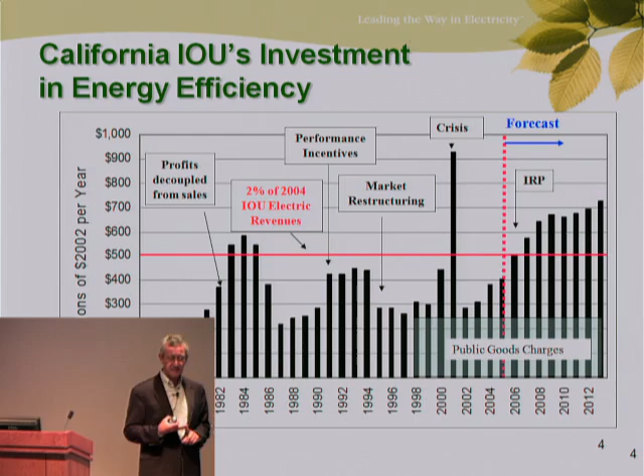So we've had a very long history of providing incentives, of marketing our programs, and you can see during the energy crisis, there was a lot of investment. And now, finally, instead of reacting to short-term needs, one crisis after the other, the state has developed a long-term plan to build in efficiency and to build in the right signals for customers so that we can have a better future.

Now, over those years, we have avoided building lots and lots of power plants. And the hardest thing for people to understand is what you don't have. We all understand what we have, and we all understand what was taken away from us. But we don't really understand what could have been.

And you can see here, we have avoided building or buying all of this energy as a result of the leadership of the state of California, in that California would not allow the imports of inefficient appliances, like refrigerators and water heaters, number one. The second thing is that California won't allow inefficient buildings. We have building codes, Title 24. This building that was built in accordance with state standards is more efficient than most other buildings across the country.

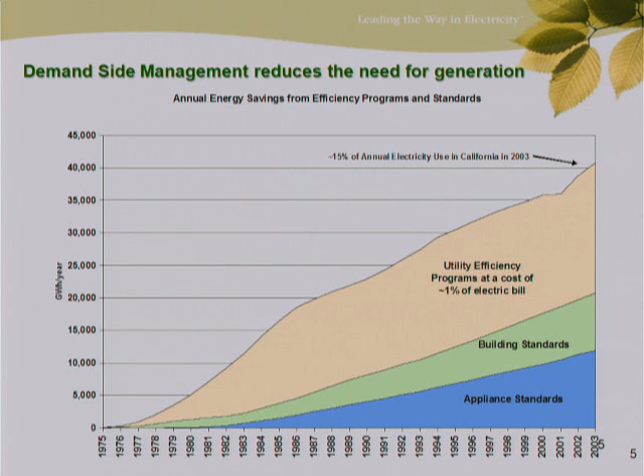And the third thing is that once you decouple the profits from sales, then utilities have an incentive to go out and make sort of unsell their product. And that has really made a difference here.

And so compared to the rest of the United States, per capita, meaning for every person that is in that state, the usage across the country has gone up. Whereas in California, it's remained pretty much the same. Even though there's 35 million people in the state, the amount of energy they use is pretty much the same as it was back in 1974.

It's amazing, even though we have lots more stuff, okay - microwaves, bread makers, big screen TVs, you name it. The energy intensity has gone up, but it's more efficient now, just like the number of cars.

So what we are doing now is replacing power generation with customer assets. We've had, for example, I believe it's Indiana, 95% of their energy comes from coal. Coal's very cheap. In China, they're building a coal plant every month. It's a very inexpensive fuel, but it's a very dirty fuel. A lot of GHG comes from coal. Nuclear plants don't generate atmospheric pollution, but you can't build them anymore because of a lot of restrictions.

Combined cycle plants are those you see out by Morro Bay and by the beach with the big plumes of steam - those burn natural gas. The more people you have, the more you need of those type of systems. And then you have your combustion turbine. This is a little small unit that you usually see over in industrial parks, and they're about 50 megawatts in size. You put those strategically. They're very expensive, but they are what you need in a pinch.

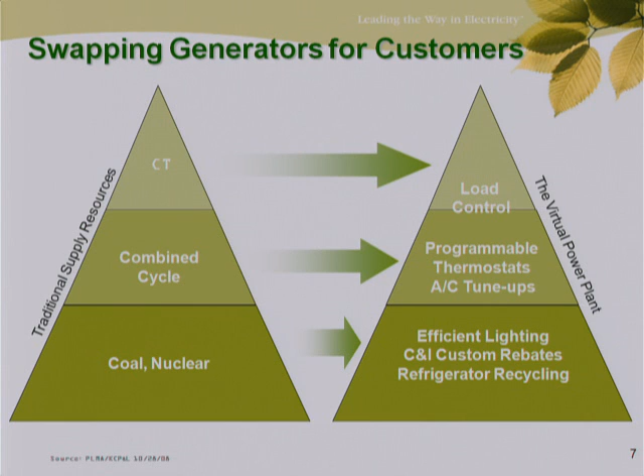So what we did, we activated load control. We turned off air conditioners. We asked businesses to shed load. And it was July 21st, sorry.

And that's when the red line, which is the usage, gets close to the green line, which is how much power you have. Because the state only has so much power - it's like only so much water.

We can't control the population. They are going to use their air conditioners when they need it because they built that house and they want to use it. So we can ask for voluntary conservation, but sometimes it just doesn't reach it.

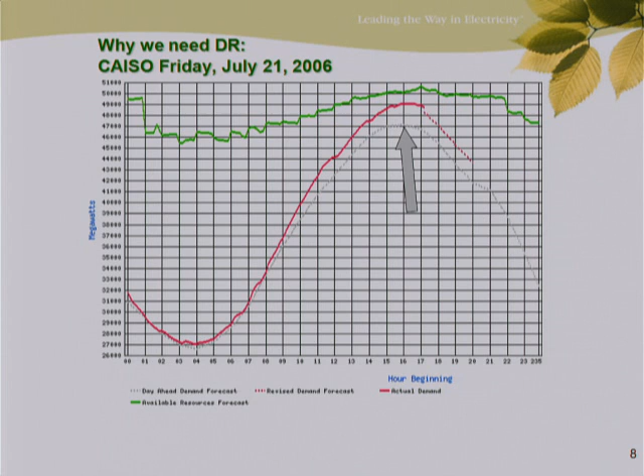So right there was what our forecast was, day ahead, at 47,000 megawatts. In actuality, we peaked up at 49,000 megawatts, but that's only because we shed.

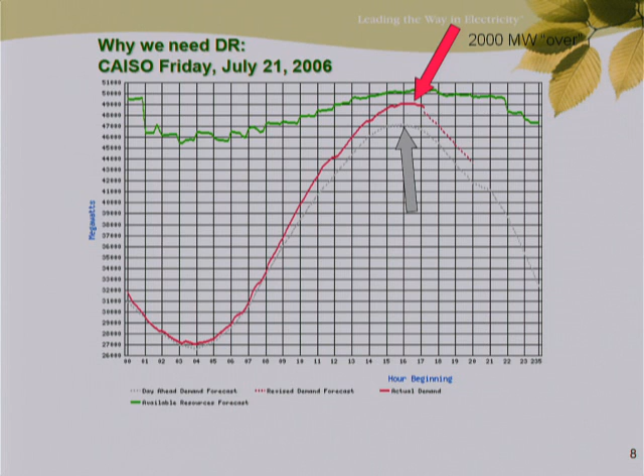Okay, and this is the impact. The red line would have been, again, that concept, where you would have been as opposed to what you are. So the actual load at Edison of all 4.5 million customers was that nice green line, but it's only because that we were able to reduce about 400 megawatts through these control programs.

That's what we like to call, and there's a fellow over at Lawrence Berkeley named Alan Meier, he calls it saving energy in a hurry. We all want to conserve energy, we all want to be efficient, but every once in a while there's a drought in Brazil, or a nuclear plant shut down in Tokyo, or in Juneau, Alaska there's a landslide that cuts off the power lines, and you've got to shut down energy in a hurry. So we always have that in our back pocket.

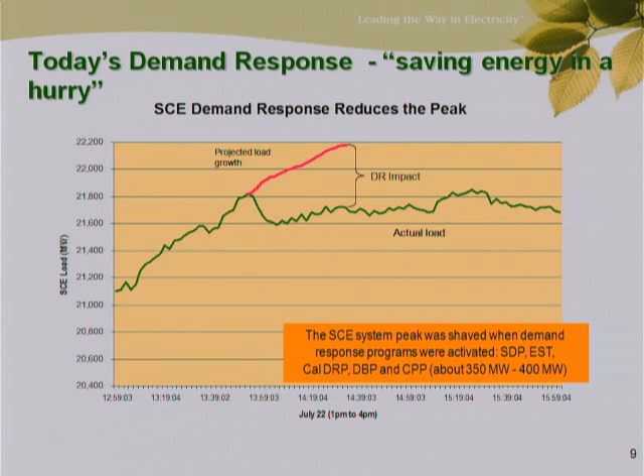So the state of California says, this is fine and dandy, we've been fussing about all these different things, but the state's still growing. The economy is good with temporary mishaps. How are we going to have the long-term vision? And the long-term vision is, we've got to stop building power plants. It's got to be efficiency, and it has to be saving energy in a hurry programs. And then, if we do build power, that's our number one priority.

The second priority is, if we're going to build a power plant, let's do it with renewables because they're cleaner. It may not be the cheapest, but it's the right thing to do, and it's less of a pollutant. Then you have, if you're going to do generation, let's do generation the right way with efficiency. And then the fourth priority is, you don't put a bunch of windmills in downtown Berkeley. They're usually out in the Tehachapi Mountains or at the Altamont Pass. You need a transmission line to get them over. And that's the other priority as well.

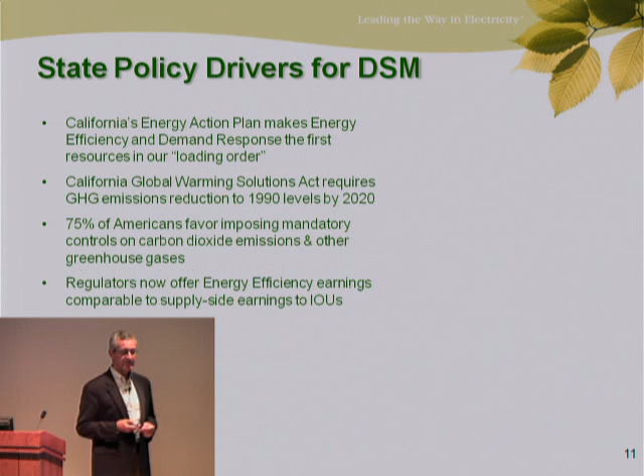So we have the Energy Action Plan, which is the first policy. There are the Global Warming Acts, GHG. There are rules and laws about reducing our carbon footprint. And there seems to be a consensus about that. And to make these programs even more effective, California regulators now, instead of just letting us earn profit on our assets, for all the kilowatt hours that we save, we can earn a profit on that too. It's called the earnings mechanism.

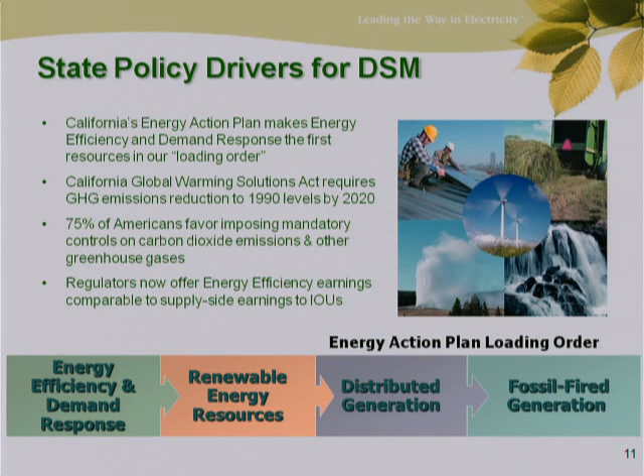So these types of things, it's the loading order: energy efficiency and demand response first, the renewables next, distributed generation, and then fossil fired last order. We've got to get all this stuff done first. Doesn't mean we'll never build another gas power plant on the coast, but we've got to get through all of these as a priority first.

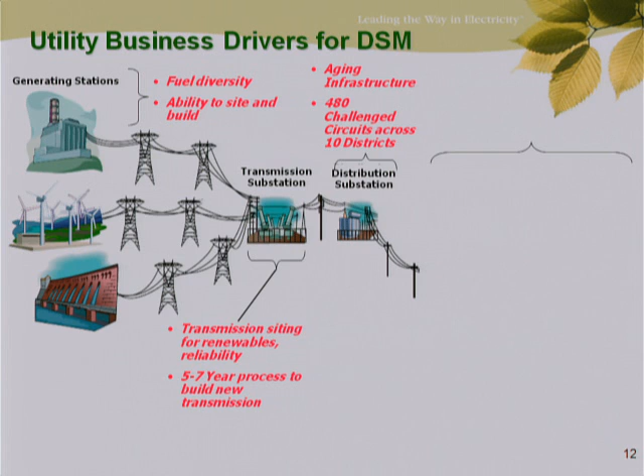Now, what's in it for the utility? Well, let's look at what we've got going here, which are our generating stations and our transmission lines. We have the ability to use different types of fuels. We have the largest renewable portfolio at Southern California Edison, so we're buying lots of renewable power. We can use water, wind, natural gas, lots of different things. And it's important that the assets we have for transmission lines, they do take a while, but we can site them effectively. However, our infrastructure is aging. After you've been a utility for over 100 years, a lot of wires and power poles and things get old, so there's a constant need to upgrade these things.

So with energy efficiency and demand response as programs, and this new thing that's coming out called Edison Smart Connect, it's all linked to customers. Now, before it was all about the utility infrastructure, the power plants and so forth. Customers weren't mentioned before, but now it's about the customers, and they become a part of the supply chain. And that's going to be important now.

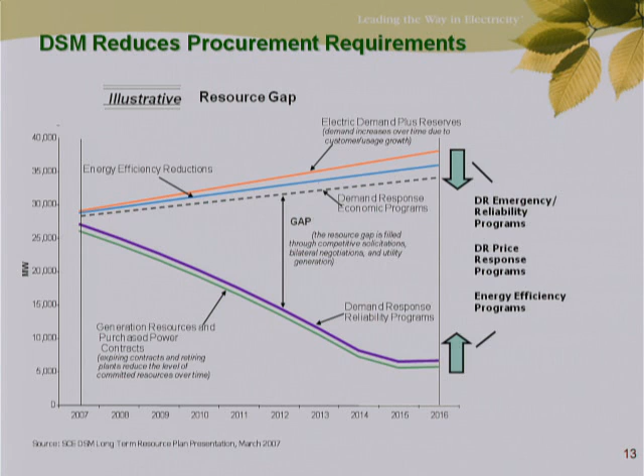This graph is a little busy, but what it shows you is that as the growth goes up, you're able to bring down that gap. You can reduce your resources. The one charter we have with utility is to maintain power reserves and be able to supply power without running out of electricity.

Customers don't understand that. They say, I'm paying my bill, why don't you have enough power? So now with the new loading order, which is state policy and may soon be federal policy, you really have to work on the customer side of things.

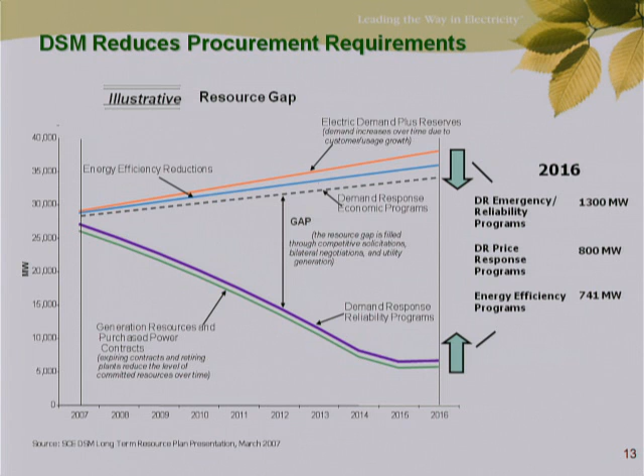So we're talking about 2016 being able to come up with hundreds, if not over 1,000 megawatts of what Amory Lovins coined the negawatt. It's not a megawatt, it's a negawatt, because it's a non-watt. You can't measure it because it doesn't exist. You can only estimate it.

So now we bring in the economists and statisticians. In the old days, it was all about power engineering, about construction and so forth. Now that you're dealing with sort of negative power, and with things that are intangible, you have to bring in the intangible experts: economists, social scientists, and so forth.

That adds up to about 2,800 megawatts of negawatts that we have to come up with.

So what's our philosophy and what's our big plan, our vision? Now the vision is what I call the nature of things, and that's what we build and what assets we have. You can see it's renewable generation and a smart grid, and then a smart connect, which connects to the home and to electric vehicles and all sorts of other things too.

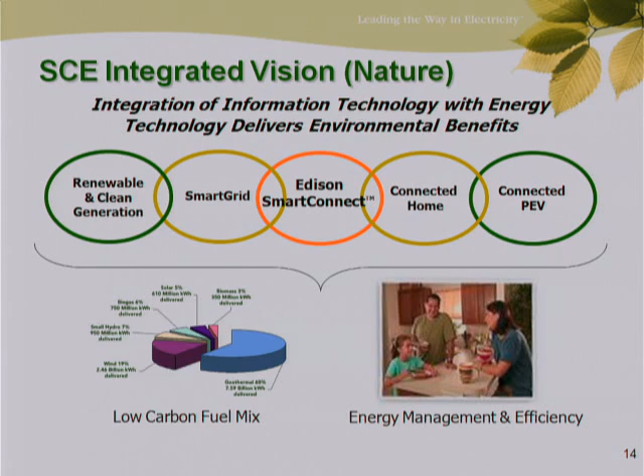Because now our customers are not just buying big screen TVs, they're putting up solar panels, they're getting electric plug-in hybrids, they're doing lots of things. We have to be smart. We used to ignore that, we'd say it is what it is. We kind of forecast and look at trends.

In the 1980s, there were a lot of water beds with electric heaters on them, about 200 watts, and we thought, is that going to be a trend? Well, they all went away, but they were replaced with microwaves, gaming systems, computers, laptops, and satellite boxes that have more than doubled the energy use in homes. People wonder why they're still getting a bill when everything's off. Well, it's those vampire loads, things that are still running. So this is all going to connect up, and the grid is going to know what's happening in the home.

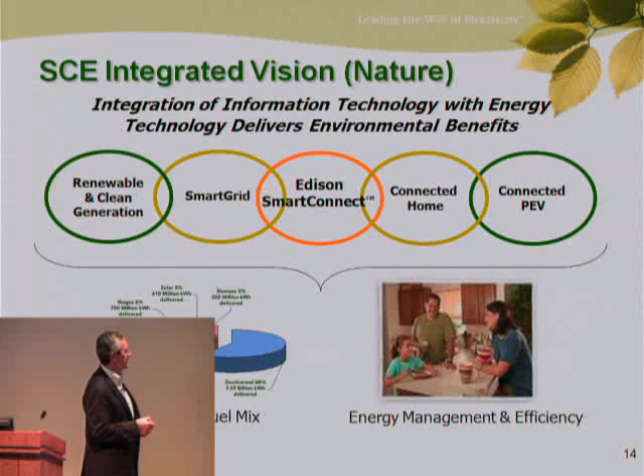Now, Smart Connect is sort of a fancy word for our metering system. Traditionally, for 100 years, meters were not very smart. They knew how much energy was going through them, but they didn't know what time of day it was, or when the energy was being used. They just knew there was so much of it, like your water meter, where the numbers are different every time you look at it.

With the new meters, I will know, and you will know, when usage is being made, being consumed, and that way we can make the electricity match the usage. That's very important, because now the whole system has to be smart.

And the other thing that's very important is that we will know when the power is out, the outage communications. So now there's a concerted effort to not only provide better service, but also better information. That's a key word, information. The Smart Connect is connecting the customer to the utility and the utility to the customer, so that they both now have information, the customer will know who is out, and the utility will know who is out.

So these meters didn't exist 2 or 3 years ago. We've developed these new meters; we put out the specification and said, industry, this is what we're looking for. The industry didn't make it, so we put it out to bid and came up with lots of different things.

This is a meter that will actually communicate to your appliances using Zigbee or some other form. The meter will also know what time your energy is being used. The meter may even talk to Google or Microsoft, so you can go on your website. There's lots of different features that are coming on here.

The meter will enable the collection of information, so you can look on your computer screen or on your Apple phone application and know that somebody just turned on the air conditioner today at home. Old meters don't do that.

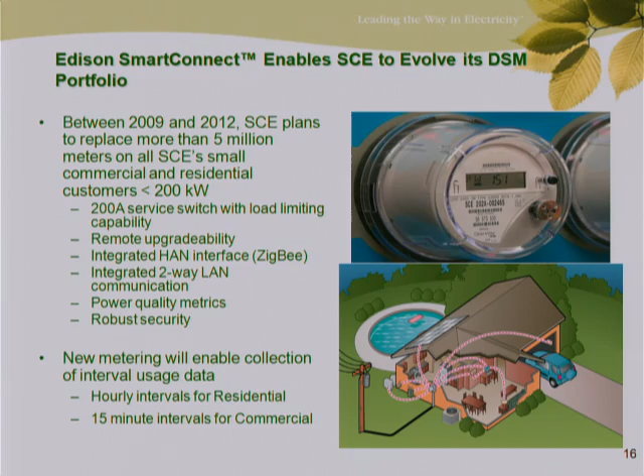Now, the question is, does anybody care about that? Well, you got to remember the other policy about California is what happened when gas prices went to $4 a gallon? It's called price responsiveness.

This is where the economist comes in. The economists will wag their finger and say, when you make the prices high enough, people will make a change of behavior. So now we're trying to affect behavior by either telling people that there's a lot of energy there or it's going to be really expensive.

So when gas was $4 a gallon, my commute to work all of a sudden went from so many dollars to a lot more dollars. So people made changing of behavior a way of life. They either stopped driving, rode their bike, or bought a Prius or something to that effect.

So there is a lot of functionality with these smart meters. And from a mechanical engineering perspective, this is a very big change. The meter hasn't changed in 100 years.

We talk about the rule about technology changing all the time. It's like computers from 2002 - my gosh, we're talking really old school. Well, these meters haven't changed since the 1940s or 50s.

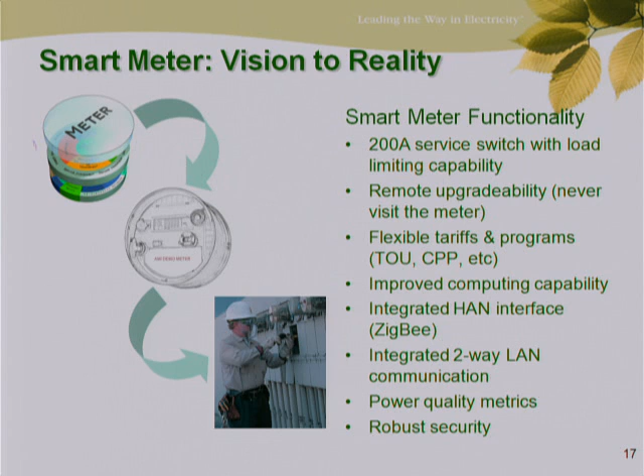And so now we have a whole new technology where it will be computing, it'll understand, it'll have LAN communications, and have a lot of security.

It's interesting that we came up this technology adoption curve where there have always been meters that were sort of like new tech, but they weren't smart and didn't do all these neat features. With the new meters, we have really gone up to this leapfrog effect here.

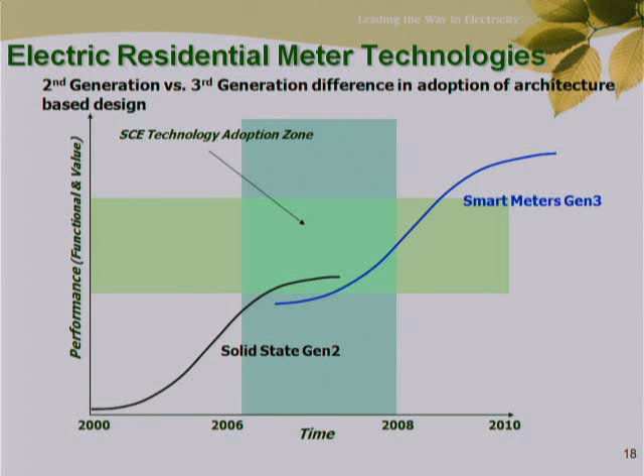This is called automatic meter reading. There were meters that did talk, so we wouldn't have to use meter readers. But now we have advanced metering infrastructure, so now the entire network is connected.

And later on, there'll be applications where you can talk to the meters, applications for WiMAX and broadband and so forth. So this is our roadmap.

Now that we're armed with these new meters that'll do anything and everything, now we can do all sorts of neat stuff. It's no longer just building power plants and putting out newspaper ads for conservation. Now we can file new tariffs and new rates.

How about an electricity rate that is more expensive during the middle of the day and really cheap at night? That'd be cool because what it will do is tell you don't run your dishwasher during the day, run it at nighttime. It's cheaper, but then you need the information structure.

So we're going to have these new types of rates, new thermostats. Wouldn't it be great for the thermostat to know what time of day it is and when the price is right? Wouldn't it be great for your refrigerator not to make ice when it's not supposed to?

And then, of course, there's a big leap here to educate people. Rather than just take the afternoon off, we want your appliances now to be knowledgeable about the pricing and so forth. And that's our roadmap for the next 3 years until we get up to our 5.3 million meters.

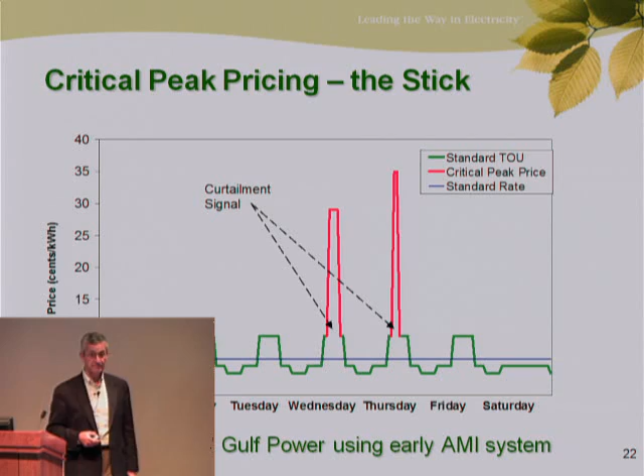So that's like, that's not fair — why are they doing that to me? Well, that's the price signal that the economist says will get you to reduce. Now, you have to be aware of that change, and wouldn't it be cool if your building was smart enough to know that's what was happening, so you don't have to run around and do that.

That's called smart technology. So there's a combination of two things going on here: the pricing of electricity in California is going to go this route — that's a fait accompli. What will technology do to deliver customers a way to minimize their costs?

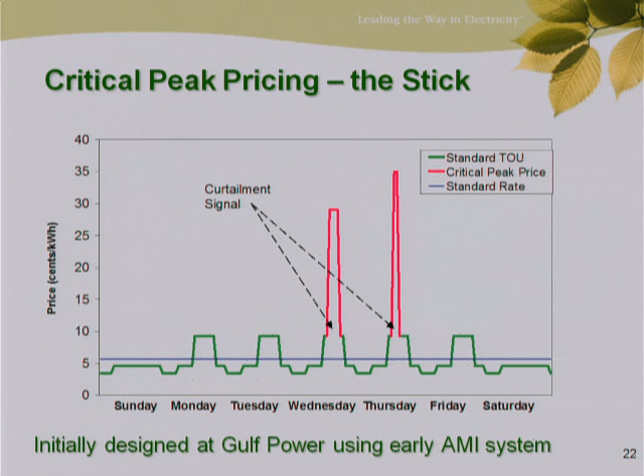Let me go back — that's the stick. In other words, expensive, do something about it. In the city of Baltimore, which is a kinder, gentler place, they decided, let's use the carrot approach. Instead of giving customers a high price, let's do this — let's give them a rebate.

So on a critical day, if you don't do anything, you still pay the 18 cents. But if you do something on a critical day, well, actually you still pay the 18 cents. But on a critical day, if you reduce your usage by half, I'll double your money — in other words, you get to save because you didn't buy anything, but I'll also give you a credit for the energy you didn't use. So that's called the peak time rebate, and it's an interesting approach.

Now, if there are any social scientists in the room, there's a number of behavioral factors going on here: gaming theory, the stick and the carrot, loss aversion — how do people react to these types of things? That's a very important concept. It takes a lot of education and a lot of training to get people to respond to these programs.

For years, we have just been paying our electric bill. We look at it once a month, we see, oh, here it is, another $50, or I better do something next month to change that.

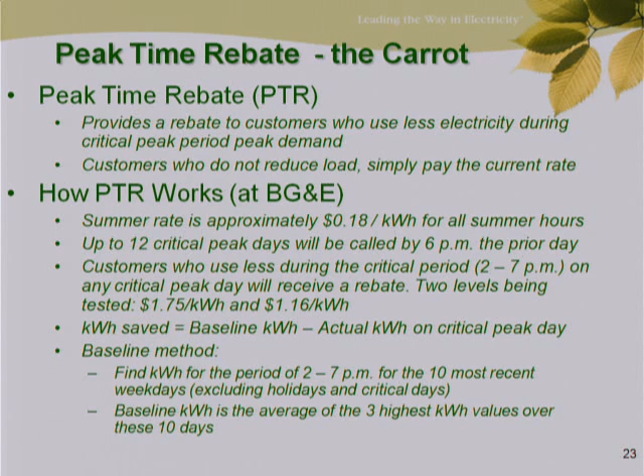And then the price changes, and it's not really something on our minds. Electricity is becoming a dynamic commodity. And in the next 10 years, the vision is that you will need to track it, or you'll need something to track it for you so that you can reduce your costs.

So this is our simple engagement, which is now the nurture principle. Okay, we've got enough technology out there. Now do we need to engage our customers in education and to change their attitudes and then to change their behavior through a two-way dialogue.

And that's going to be with the metering system. So once you've got a gateway into the home, or a website or something, you can now interact, and there's lots of ways to interact.

I mean, this is stuff that I think is already out of date, even though it's just last year. We're not talking about iPhone applications here. We're talking about simple thermostats. There's a lot of ways to interact. General Electric just came out with the fact that they're going to be producing smart appliances now. That's going to be a product line.

The electric vehicles will all be hooked up to the meters. They'll all know what's going on.

Who knows what's going to happen, but there's a lot of predictions because you're going to be able to have a lot of information for now smaller customers. Large customers have always had this information, but they didn't really do much with it because there's really not much they can do day to day except manage their costs.

But residential customers, it's the 80-20 rule. 20% of our customers use 80% of the energy. The residential customers are responsible for a lot, and they're now going to get this. So we have to do a lot of communication with them.

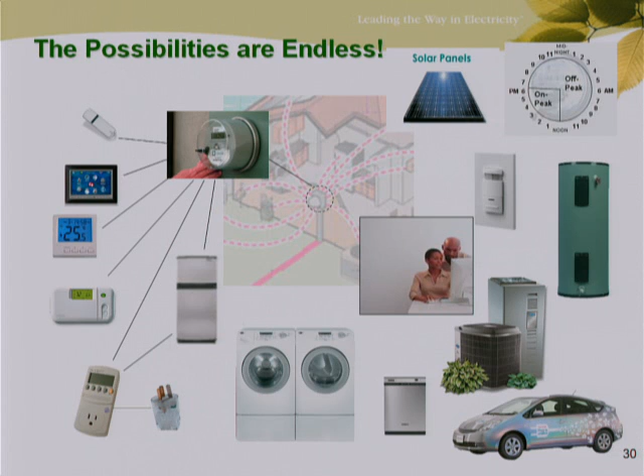Can they get a rebate?

Well, that's a good thing because currently the way the rebate structure is set up is for efficiency. For example, Energy Star labeled appliances are pretty efficient and they will reduce your energy cost, for an additional price, and so forth. But maybe there will be, for example, there's a thermostat at Home Depot called RiteTemp.

Probably when all the meters are installed, we'll have a little sticker on it that says, if you buy this thermostat, you'll get $10 off because it's compatible with the PG&E Smart Rate program. And the same thing like compact fluorescents. Compact fluorescents are very inexpensive because they're subsidized by the utility.

So you have to keep an eye out, and that's one of the things we're looking at, is when all this technology is installed, vendors—you have to remember, GE and Westinghouse, California is just a niche market. They sell to the United States, Europe, South America, and the Pacific Rim. So 10,000, 20,000 washing machines isn't that big a deal to them. But they are starting to look at this sort of thing.

Now, with the price signals, the rates, all the information, sometimes that's too much overload. So several years ago, Edison and PG&E said, you know, everybody's got their BlackBerry, their iPhone, they're getting paged, getting emailed. It all gets lost, the information. So we did an experiment.

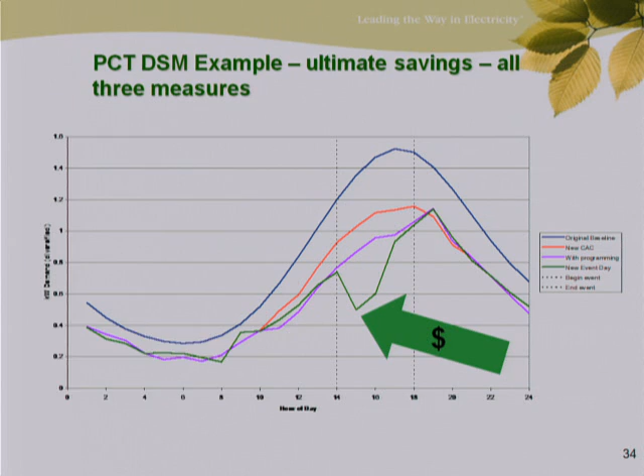Just one quick thing here. Wanted to show the thermostat, and this is the research that was being done: the normal thermostat, the energy efficient thermostat, the thermostat with the programming, and the critical peak thermostat. So there is one technology that's here today that UC Berkeley helped develop. It's in the Home Depot stores now, and it is a smart thermostat. If there's any example of a technology that benefited from research and the communication between industry and academics, it's the thermostats in the Home Depot. So with that sort of example of a success case, I think there's a lot more opportunity for future innovation.

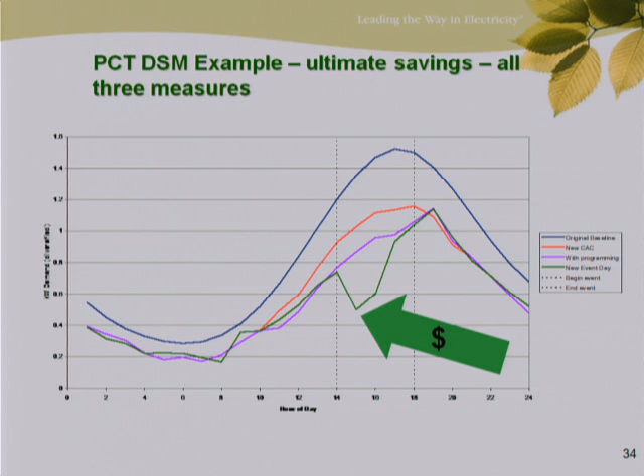Well, the thing about it is that it's not mandatory, you know? Don't put a chip in if you don't want to, but look at all the savings you're missing out on. But how do we know, because it'll turn itself on because you pay a super high rate, but if it can't tell you that it's paying a super high rate, you basically circumvent the system? Well, you can, but the thing is that you don't have to join the rate either. This is all optional and it's all voluntary.

Other delivery channel we found is word of mouth, is that when people start talking to each other—I mean, how do you think cell phones migrated so quickly? Microwaves, all these other technologies, the adoption rates—it's people talking to people. Come over and see this new color TV that I installed in my house, I'm the first on the block. Before you know it, they're all being sold. Okay, thank you.